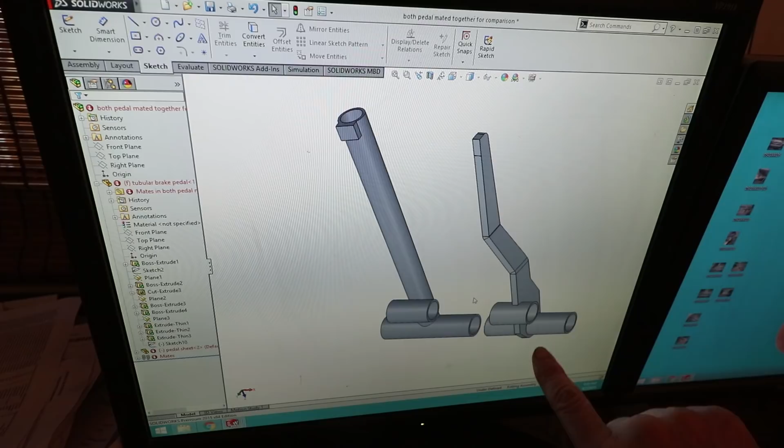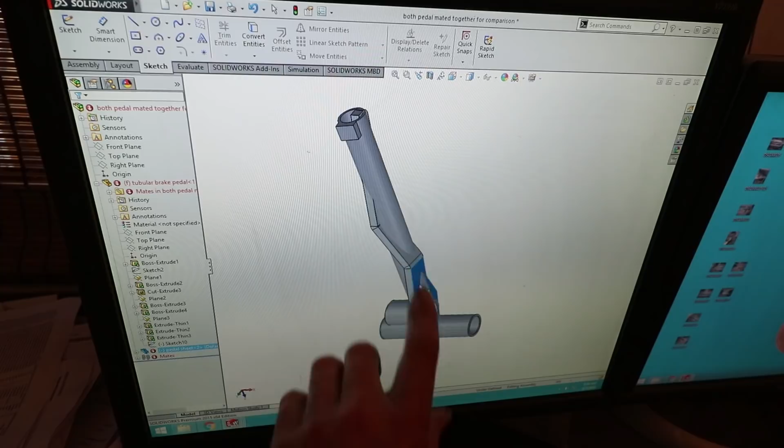Okay, here we are on my computer. There are two designs. This one is the one I currently have, made out of essentially sheet metal, even though it's 5/16 inch. This is where it pivots in the pedal box, and this is where the brake balance bar goes. This other design is an alternate using tubes as opposed to bending the flat sheet into the same shape. If I push these together, I can superimpose them onto each other and they're essentially exactly the same. These tubes line up roughly in the same place, and the brake pedal positions are about the same, at the top. So these are equivalent designs, just different materials and probably different strengths.

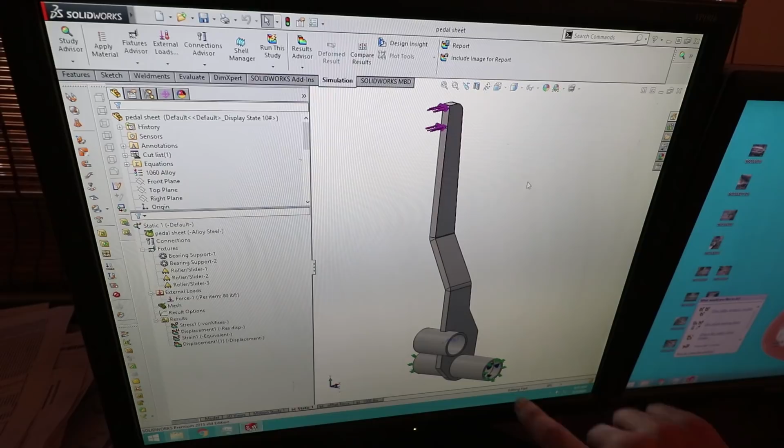So let's analyze that. To get started, I applied a force here on the end of the brake pedal. It is directly in line with the pedal, 80 pounds. That's more than enough force in my brake system to lock up the tires. Down here is where it attaches to the pedal box with some bearings. The computer can analyze the stress of the part and show the deformation.

I'm going to turn that off for a second. Now you can see where the force is applied, and here are the stresses. The yield strength of this material is well beyond this scale. This goes to 1.5 times 10 to the 8th. The yield strength is 6.2 times 10 to the 8th, way up here. So we're not even close to permanently bending this brake pedal, but just for purposes of illustration, you can see where the stresses are.

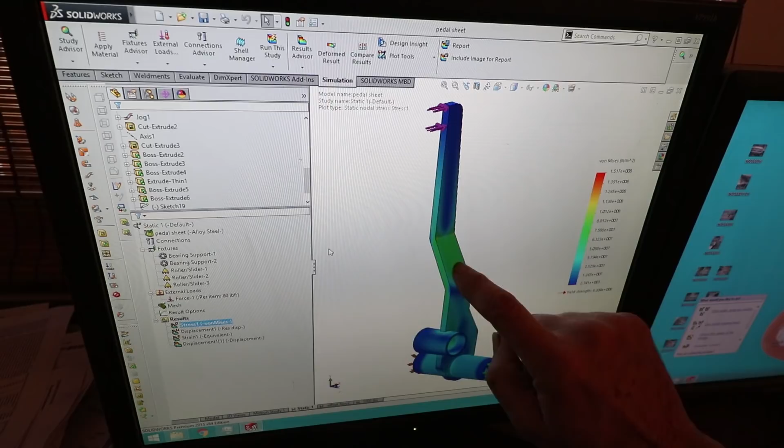Here's where it starts to neck down a little bit, and there's some bending, so there is some twisting action on the brake pedal. There are some stresses here in the tube where it attaches. Here are the bearings, no stress. And then between the tube, it starts to flex a little bit, you can see some stress, mostly as it gets closer to the pivot area.

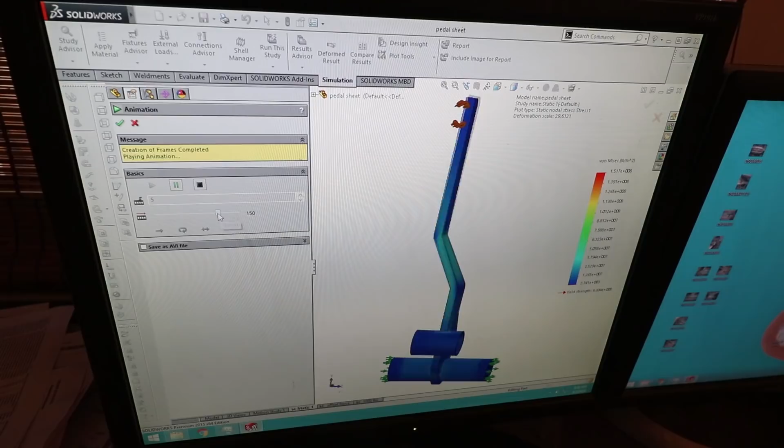This software will also allow me to show the deformation, what it looks like as it's actually bending. Let's slow this down a little bit. So this is me pumping the brake, so to speak, and you can see how stresses are developing.

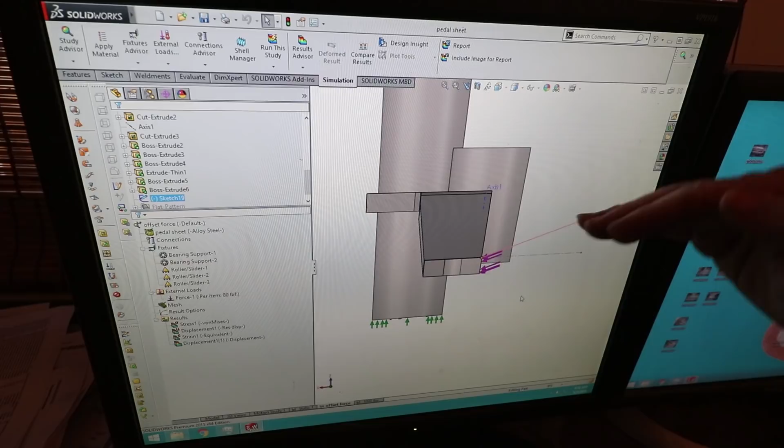The next thing I did is I took the same pedal and the same force, but put the force on at an angle, a 20-degree angle. This is how I put it on before, and now it's coming in 20 degrees. This is a little bit more realistic since you're using your right leg, and if you're not pushing straight on the pedal for some reason. This is pretty extreme, 20 degrees, and that's going to cause this to deflect more this way. Let's see what happens.

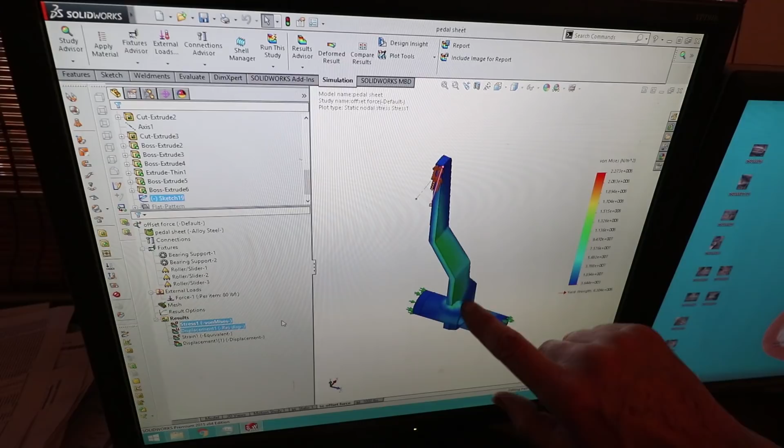So let's turn the stress on for this one. You can see the colors haven't really changed that much. The scale is roughly the same, and there's still no chance of bending the pedal permanently. But what's interesting is when you turn the animation on, you can really watch how the pedal behaves. Let's slow this down.

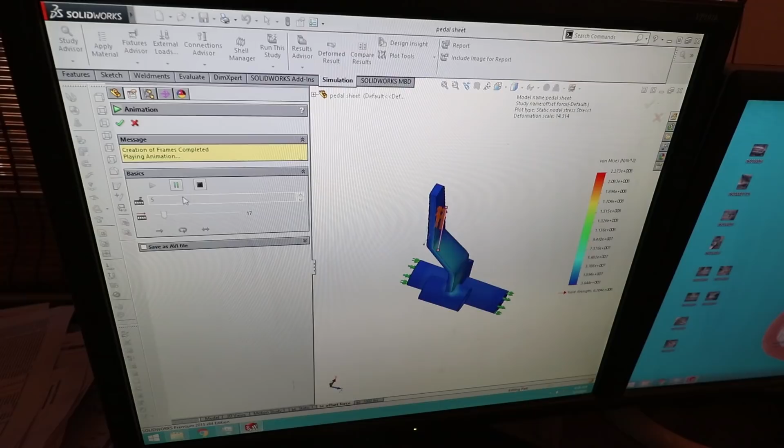Again, this is exaggerated and it looks like it's bending a lot more in this direction than it does in this direction. And that kind of makes sense. If you look at the shape of the pedal, it is going to be very strong in this direction because it has so much thickness to it. But in this direction, it's really thin, so it tends to bend this way.

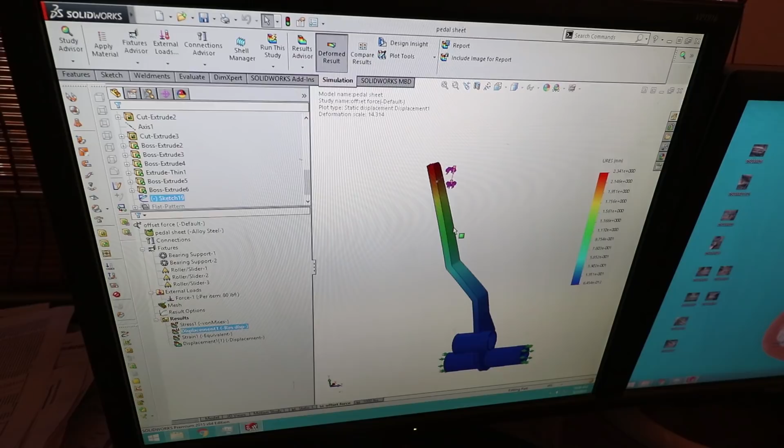And we can also look at the displacements. So this particular design with 80 pounds, this is showing a plot of displacement in millimeters. At the very tip, it's displacing a maximum of 2.3 millimeters. That's both in this direction, but most of the displacement is in this direction.

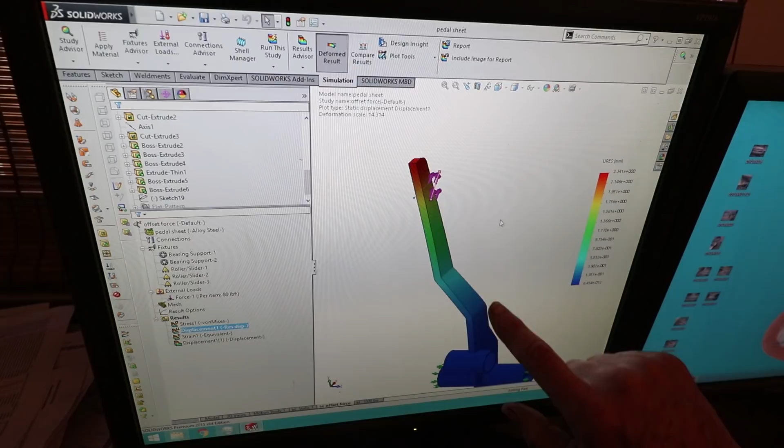So going back to the previous design, the displacement when you push the force directly on was only 1 millimeter. Now I talked about adding some gussets here at the bottom, which may not do much good—there's not much stress down here. Or adding some webs on the back of this to strengthen it from pivoting in this direction. But that's the benefit of a tubular design, is it's the same strength in both this direction and in this direction. So let's look at that one.

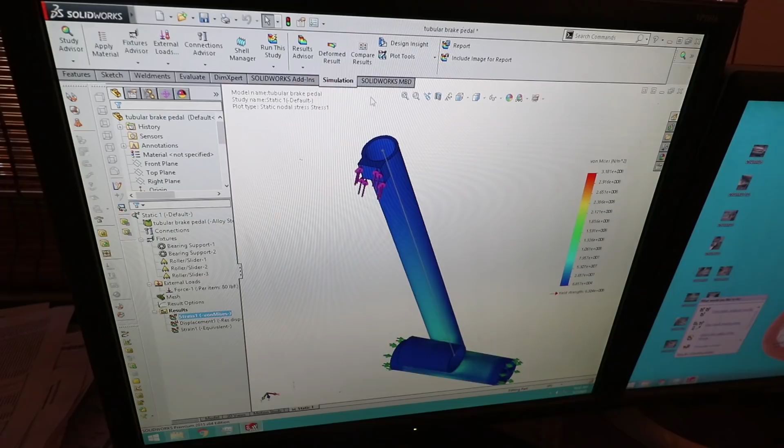Okay, for this design, I just went right to the angled 20-degree force, still 80 pounds. This is what the stress looks like. Now this one has more stress, so the yield strength here is still way off the chart, 6.2, but now the top of the chart is about half of that. So this one does have more stress in it.

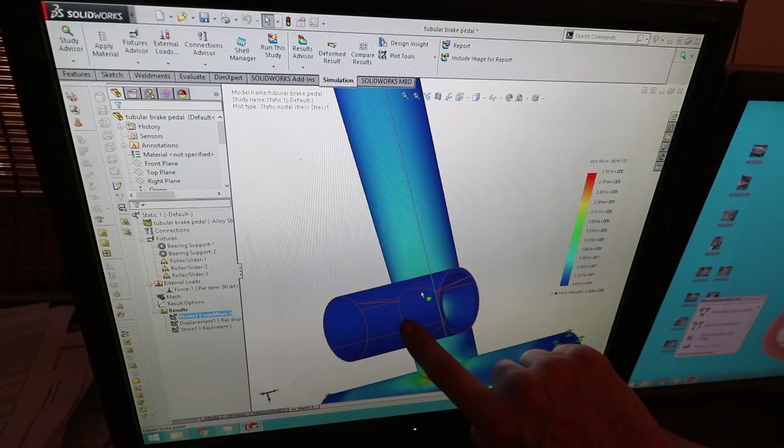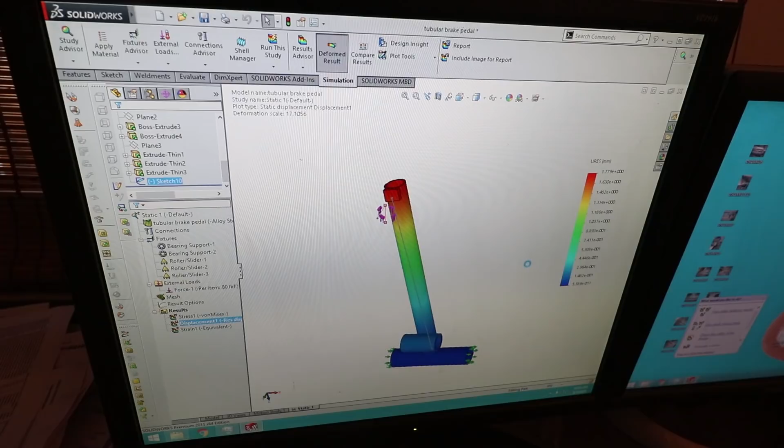There is a spot down here right where it gets welded in the fish mouth, pretty high stress. That would probably be something to gusset from this balance bar tube down to here. This material is 1 inch by 0.093 wall, which is pretty thin, pretty lightweight. If you look at the displacements for the same amount of force, this thing is 1.7 millimeters. 1.7 is less than the deflection due to the thin bar that we showed before. So this one does have some advantages, although it is higher stress.

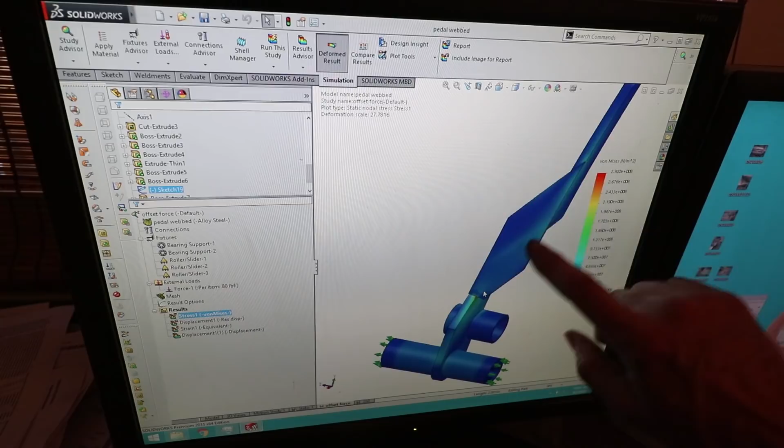So then, while I'm here overkilling, I thought, why not just put the web on the backside like I was going to do anyways and see what those results are. So for this, the load is the same. The stress now is still very low—6 would be way up here. This is at 2.9. The plate does take some of the stress. You can see it start to develop a little bit of color, and it should help in terms of the deflection.

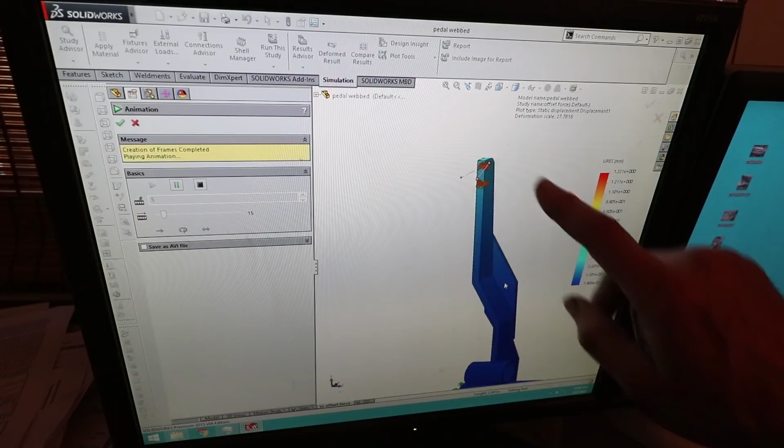So if we shift over to the displacement, this has a total displacement of 1.3. So I can animate the displacement. In this case, the red is not the stress—the red is how far it displaces. So obviously it's going to displace the most at the end. And it is still shifting to the left. The whole pedal is bending to the left, which is to be expected.

The plate helps it a little bit. It actually brings it down to 1.3. That's less than it was with the tubular design.

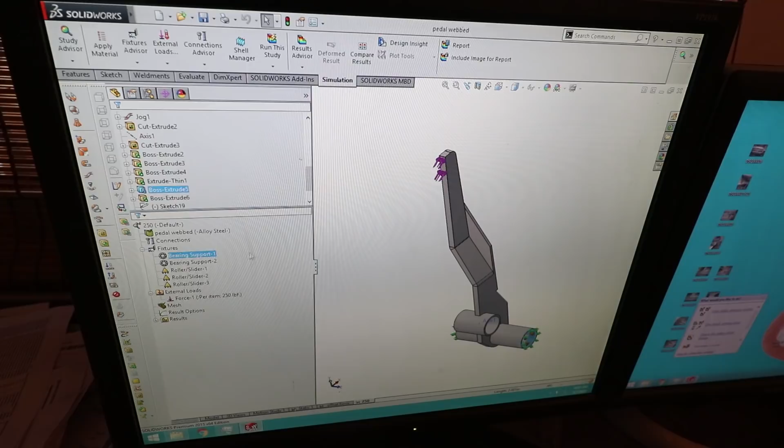So the next thing I did is I tried to break it. I'm putting 250 pounds on now on the same angle. So let's look at these results. So now the yield stress is on the chart. This arrow is what the yield stress is, this is just regular steel. It's at 6.2 times 10 to the 8th, and we're starting to see the stress creep up towards the yield strength. So nowhere near this sort of green-yellow, but we still have a little bit of blue-yellow here, so we're starting to creep up on that.

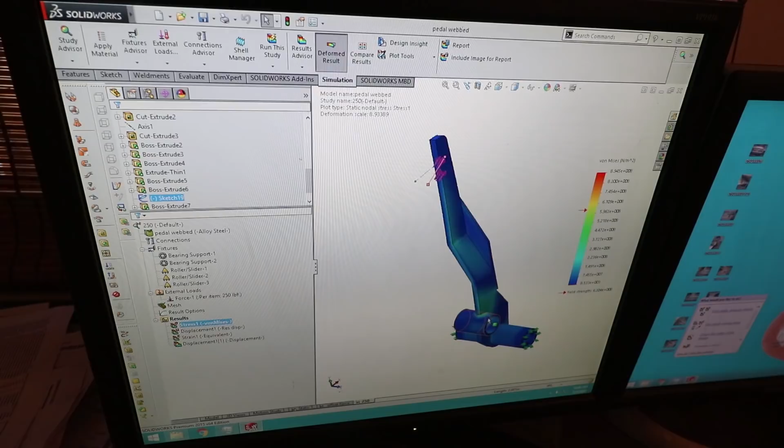Now 250 pounds with a single foot, you know, that is really a panic situation, maybe even an accident situation. I don't see the pedal continuing to yield right here. The displacement is now at 4 millimeters, and I will animate this deformation.

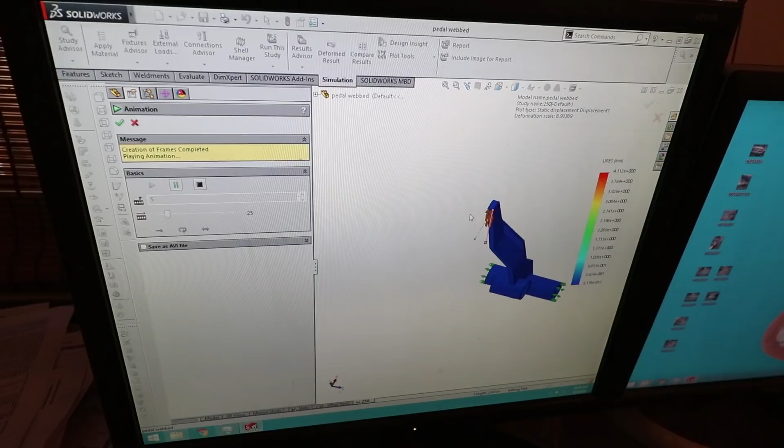Even though the force was tripled, the computer is going to exaggerate it to almost look the same. But what really matters here is the total amount. This was moving, when it gets to the red, it's moving 4 millimeters. Now in reality, with this much force, the pedal box is going to be bending too, and so is the floor it attaches to. This is only analyzing the brake pedal.

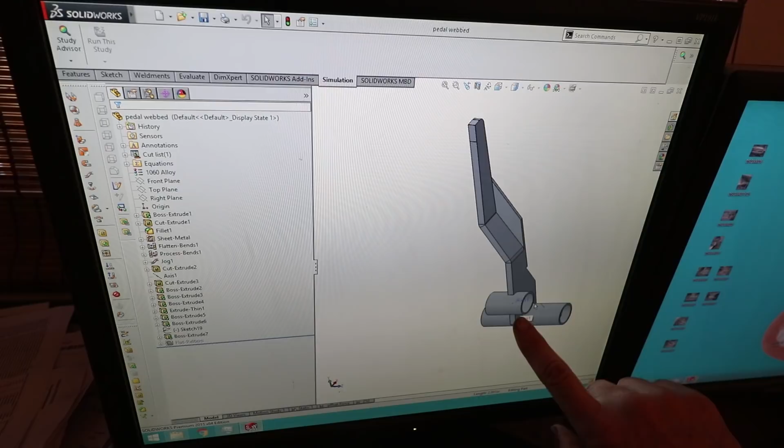So the other thing about this pedal design is it does allow me to use the stock recoil spring because it latches around the back of the pedal. That's a plus on this design.

So there you go, a little diversion into engineering and some of the tools that we use to evaluate which design's better. You know, there's more to it than that. That software is not perfect—it does make mistakes.

Now I'm going to try to cut this out. This is hard to cut out and bend. So if I can't bend this like the factory one was bent, then guess what—I'm doing the tubular design. You've got to be able to make it too, not just design it.

Not the smoothest cut, but I needed to get through it somehow.

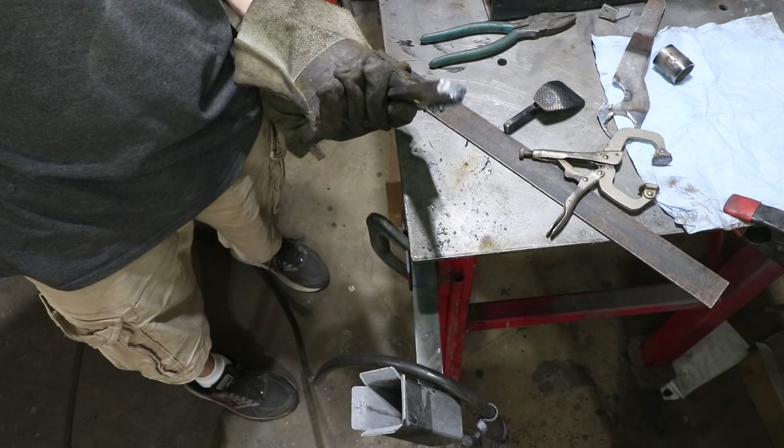Okay, I'm pulling on the press really hard right now and I'm starting to get nervous. It is bending, but I'm starting to see some things moving in the dies that I don't like. So I'm going to stop here and reevaluate if there's a way to make this easier.

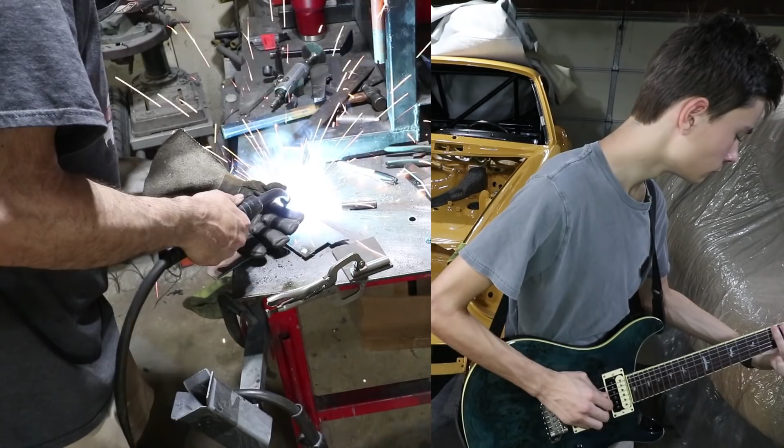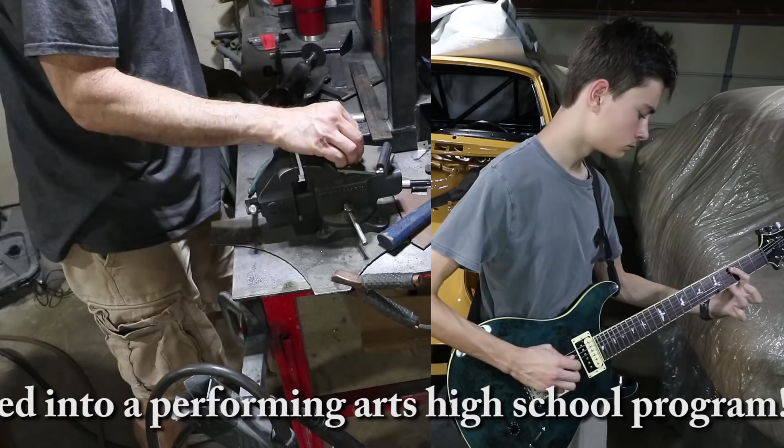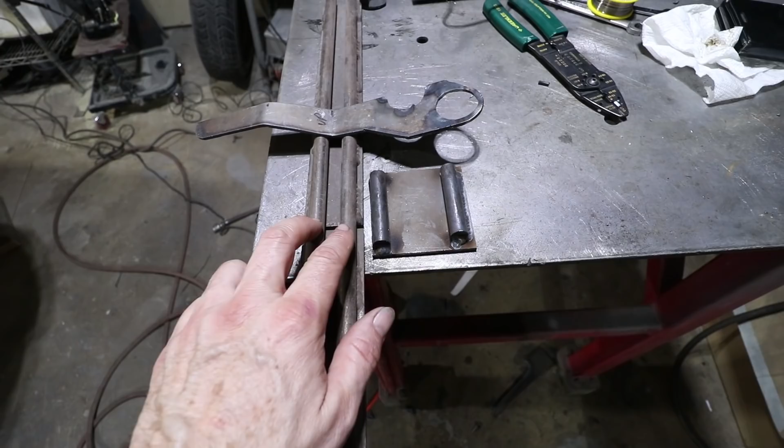Here's the change I made in the tooling. So this is the bottom die and the spacing here is about 1 inch. Spacing here is probably 2.5 inches. So when the upper die comes down, it spreads the load over a wider area, and so it's easier to bend when the forces are spread apart. That's why I did this. It reduced the tonnage significantly.

Definitely be safe, guys, when you're using your press.

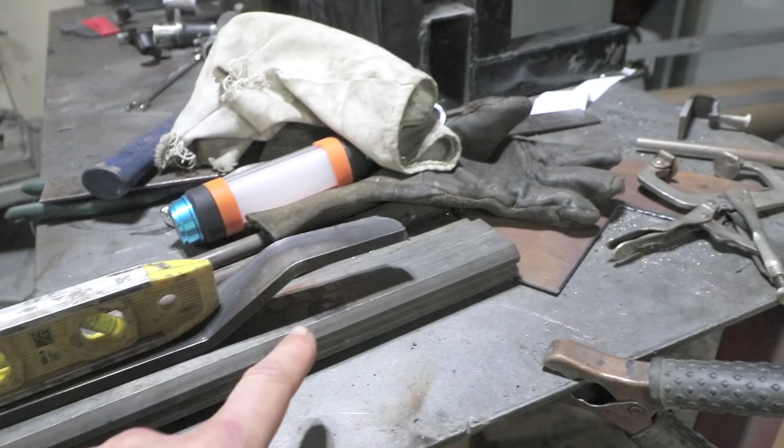Okay, this piece, I got both bends in it and I'm just checking to see that they're parallel. Here the bubble is pretty level. And then if I move it, it looks like I might have overbent it just a tiny bit, but it's good enough for a brake pedal.

I didn't cut this entire thing out. I didn't put the holes in here and this half moon shape in there because I wasn't sure I was going to be able to bend that. It did work out—when there's a will, there's a way. But I got to a point where I was stuck and I felt like it was dangerous. So if you get to that point, you got to stop and reevaluate. I changed the tooling, which wasn't that big of a deal, and now I have something that's bent pretty nicely and pretty close to what I had previously.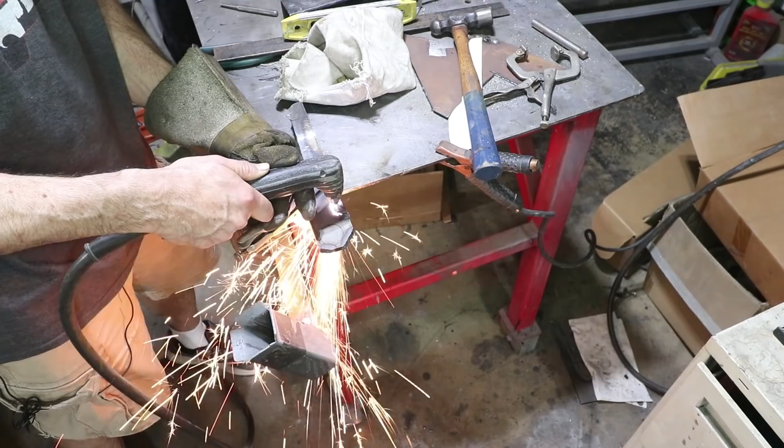Okay, I have a tremendous amount of grinding to do on this thing. Because it's so thick, the cuts are not that great. And I'm being conservative. I only have one of these bars, so if I make a mistake, it's all over.

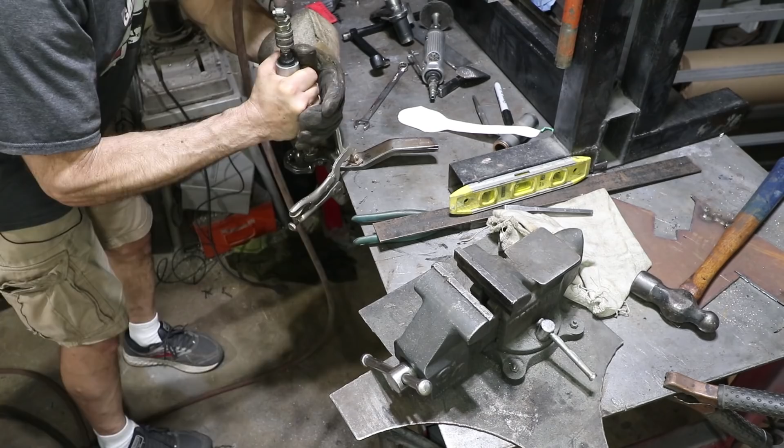Well, here we are, we have a brake pedal. It's made out of sheer determination. This is not the easiest way to do it. The easiest way is to take that file I have on my computer and email it to a laser cutter or water jet cutter, and I would come back with a perfect part. But you can do this kind of stuff at home. I roughed it out with the plasma cutter and just did a lot of grinding on it till everything fits.

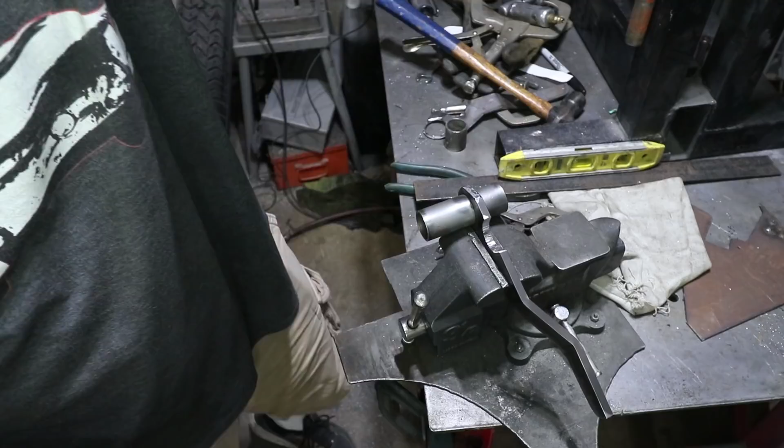So now it's time to weld it together, and this is an expensive pedal. If I was doing this engineering—a finite element analysis and comparison between pedals—I would probably charge someone about $2,000, and that would not include the prototype. So just a little FYI into the engineering world, that's what it costs.

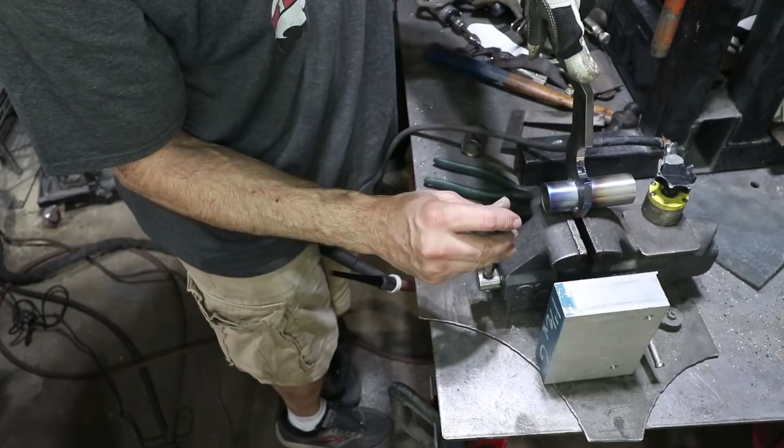Yeah, this is pretty tough to weld because it's so different in thickness. So what's happening is it's really cooking this thinner tube. So I'm going to let it cool down before I continue. But so far the welding is going okay. You just have to really focus on where the heat's going.

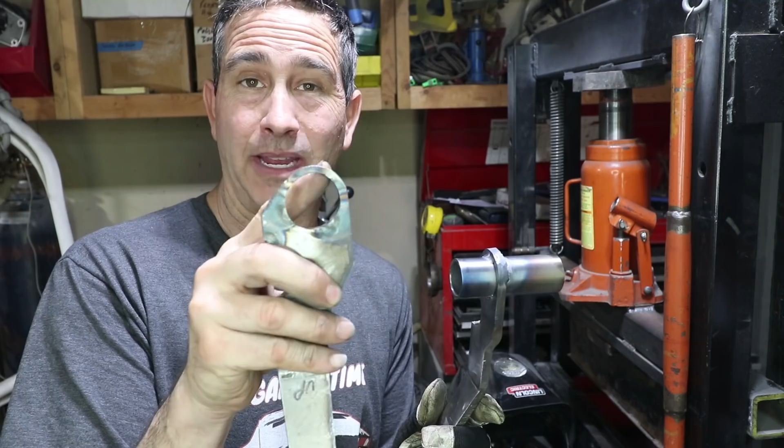I left this flange on here long. If you compare it to the other one, this is how thin it needs to be in order to clear the pedal box. But on this part, I left it long, and that's just to make it easier on the welding because I'm going to trim it later on. That prevents me from just chewing away or eroding the edge there.

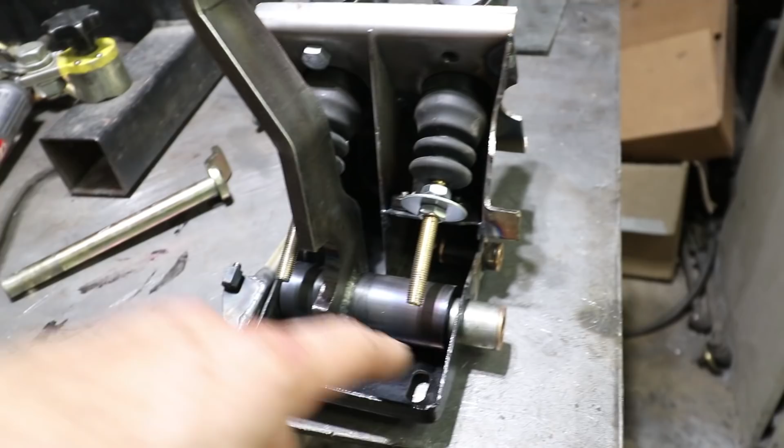Brake pedal's now back in the box, and I don't have the bushings here on the end. I'm not done welding yet, so I don't want to put those in. It heats them up too much and the oil starts pouring out of them.

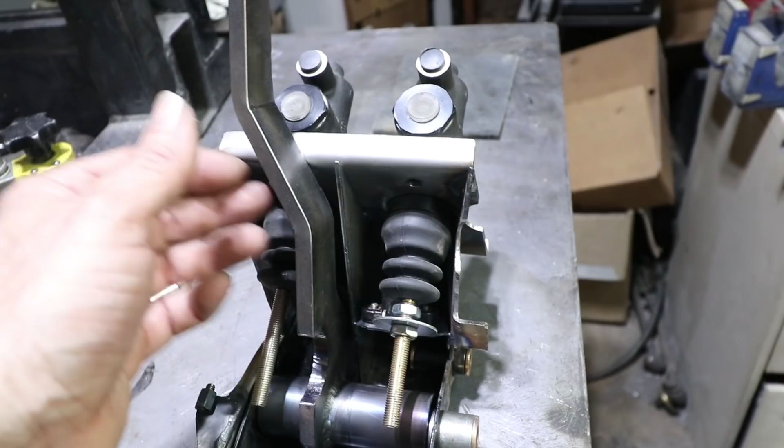But I am looking at now where to put these gussets. Previously, on the computer, I had shown them here on the back, but at full pedal travel, which you'll probably never ever do, that's going to limit some travel because it's going to be an extra piece on the back. So now I'm thinking about just putting the plate from here to here, kind of centered on the length of the arm. So maybe something like mid position, like right there.

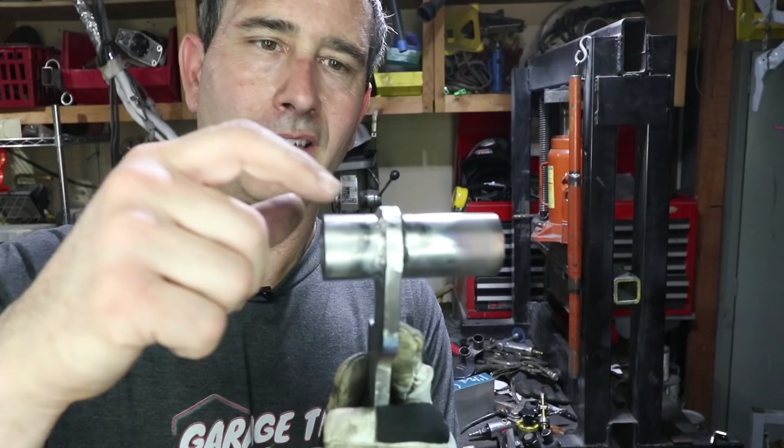And then I can put one on this side. I can also put one on this side. As long as it doesn't contact the rubber boot, it should be fine. That's what I was talking about right here, just thinning this web down.

All right, so this tube gets centered right in between the push rods for even distribution right out of the gate.

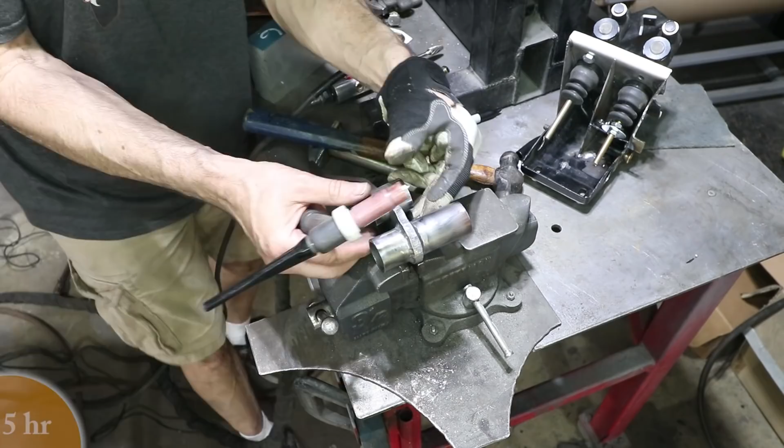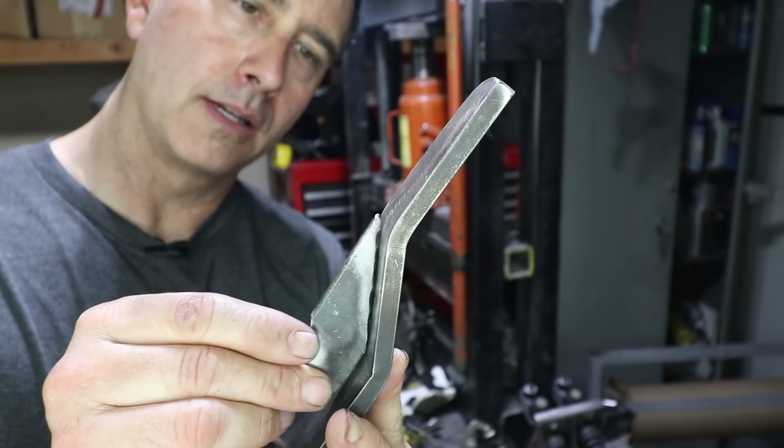Okay, I just finished cutting one of the gussets here, so I'm going to tack this in and then measure the other side.

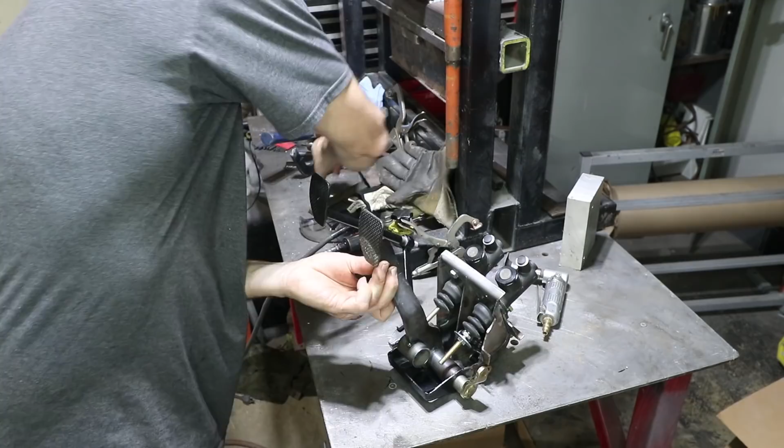Everything's been reassembled, and I decided on only doing one overkill gusset right here. I was going to put another one on the other side, but that would be almost 2 inches wide, and that's enough. Enough is enough. It's definitely overkill, I know the deflections aren't that big.

So I'm now focusing on getting the pedal positions correct. Right now this position is adjustable, it's adjustable back here and it's adjustable right here. And the position of the brake is adjustable in this direction by changing the lengths of the push rods.

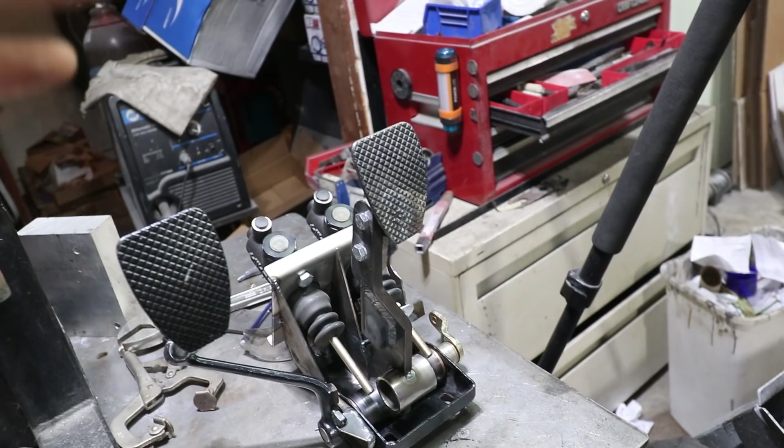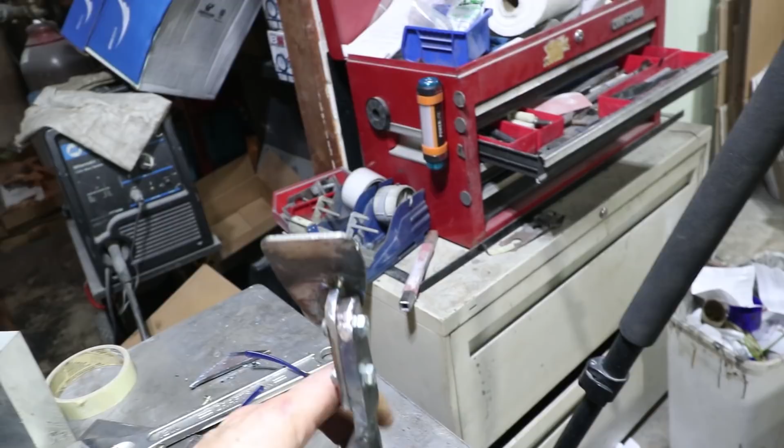Okay, so just like that, the brake pedal is completely done. It's bolted together, you can see here the 2 bolts, and it has a little bit of adjustability now from left to right. Right now it's mounted on this side of the brake pedal. If I switched it to this side, it would move it away from the gas pedal. Right now it's a little closer than stock. So that's adjustable. I could also in the future drill some new holes and go up and down if I needed to.

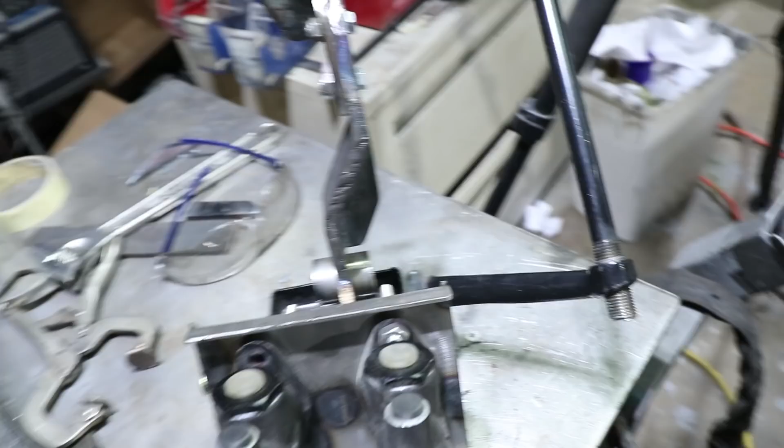And then the in and out adjustment is done here on these push rods - these push rods would change the in and out measurement. And that's about all I can do on the brake pedal assembly. It needs to be taken apart and painted, but I'm not in the mood to paint right now. I'm just going to collect a few other parts that need to be painted and put them in a pile, do it all at once.

Okay, now I'm just trying to solder a loop on the end so I can pull the wires through.

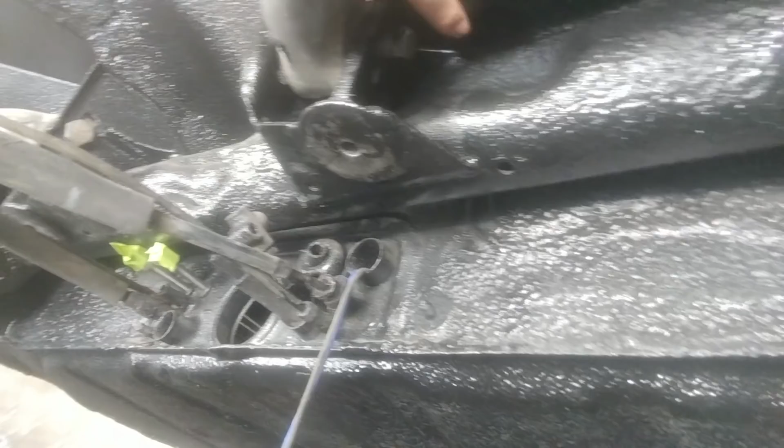Okay, right here where my hand is, next to this trailing arm, there's a slight indentation in the seat pans. That's where the wire harness goes up over this torsion tube, and then it's going to come through here into this hole right there. So I'm going to start by getting the wires over the torsion tube first, because some of those connectors just won't fit.

I won, I did that myself, and I'm all sweaty. It was definitely a workout, just pushing and pulling. I had spliced that center section, and I had some PVC areas that were glued back together, and I think they were hanging up a little bit. So if it was a brand new harness, it might have been a little bit easier.

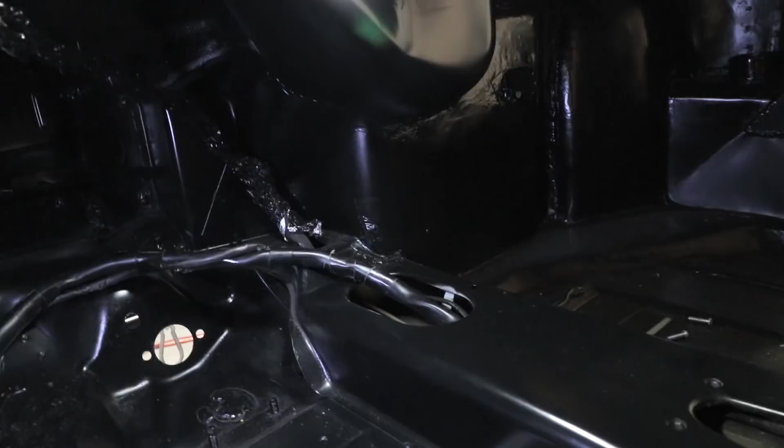Okay, there's one end of the harness right there with the blue string, and then this is the one with the green string. They're coming out of that oval right there, and I don't think that's right. I think it's supposed to come out where either the tachometer cable or the speedometer cable is, or it comes out that big hole near the pedal assembly. That's easy to reroute from here. It's just a small little step, but it's in, and all the big bundles are through.

Okay, I'm going to go inside and cool off and check out some pictures of how to position that wire harness, like I said. Hope you enjoyed the video today. I know that brake pedal is probably the most over-engineered brake pedal you're ever going to see. See you next week.